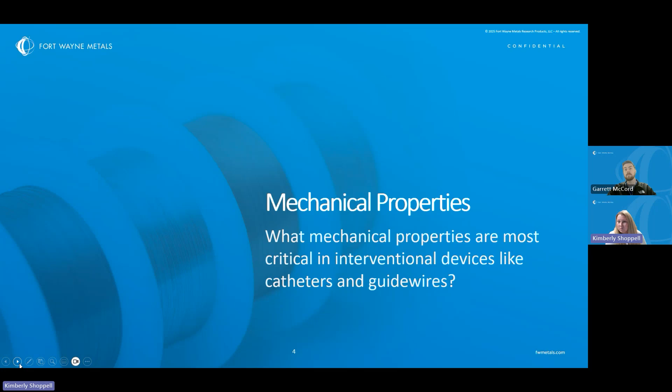The most typical mechanical properties of importance for these types of applications are generally tensile strength, elongation, modulus of elasticity, which also has to do with material choice, and sometimes yield strength. That's mainly if you want to specify yield strength over tensile strength, if you know your max load and want to ensure your device isn't yielding at any point based on those max loads.

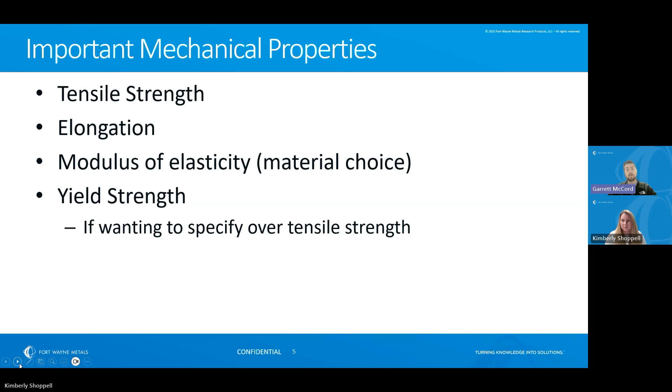So we have an understanding of high-level mechanical properties, but let's dive a little deeper. You mentioned tensile strength—how does tensile strength and ductility affect product performance?

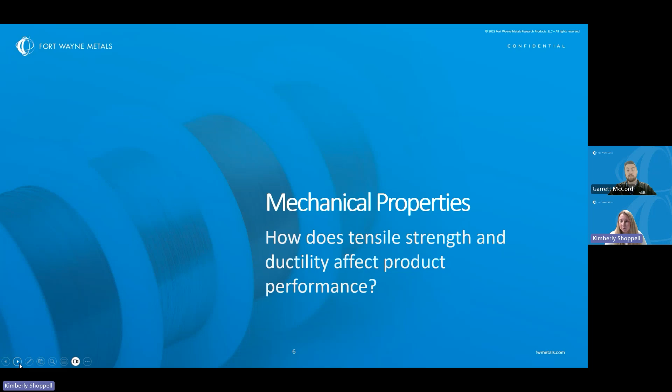Going over tensile strength and yield strength first, this really drives the main expectation for the overall strength of both the wire and the device being designed. The higher the tensile strength given a certain size, the more load the wire can handle before failure. The same goes for yield strength—the higher the yield strength, the more load the wire can handle before you start yielding your device or the wire.

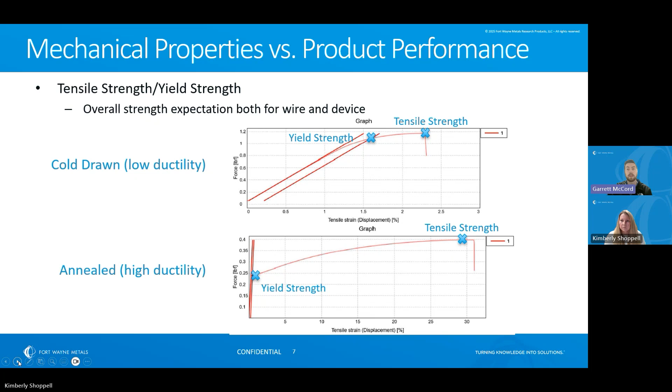Also, a higher tensile strength given a certain size for the same alloy will typically give the wire a stiffer feel. This means it's harder to bend and permanently deform the wire, compared to something like an annealed wire, which takes very little force to yield.

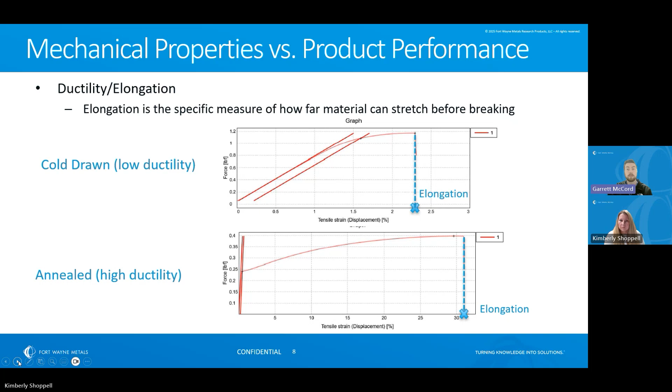Next, going over ductility—elongation is the specific measure for ductility, given as a percentage. This tells us how far a material can stretch before it breaks. So high tensile strength material generally has low ductility, and annealed or low strength material has high ductility. Both of these conditions have trade-offs that directly influence both the wire and the device.

Finally, modulus of elasticity, which I mentioned before, is due to material choice. This specifically defines how stiff the material will feel, and is just the slope of the elastic portion of the stress-strain curve.

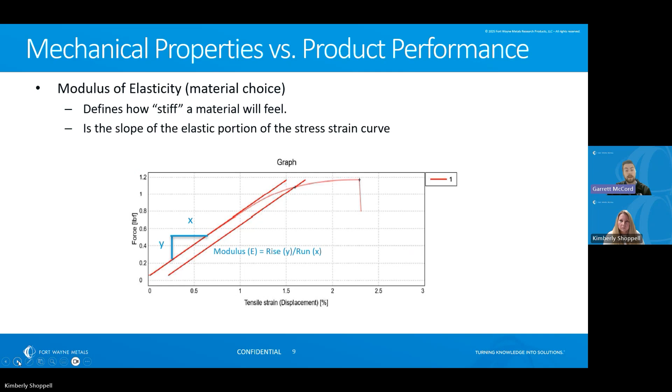All of these properties have a direct influence on device performance in conjunction with your device design in these interventional applications. Specific to guide wires, pushability, torqueability, and the ability to traverse tortuous paths are likely going to be very important aspects. A simple stainless steel guide wire may be good enough, however superelastic nitinol is likely worth a look given its special properties.

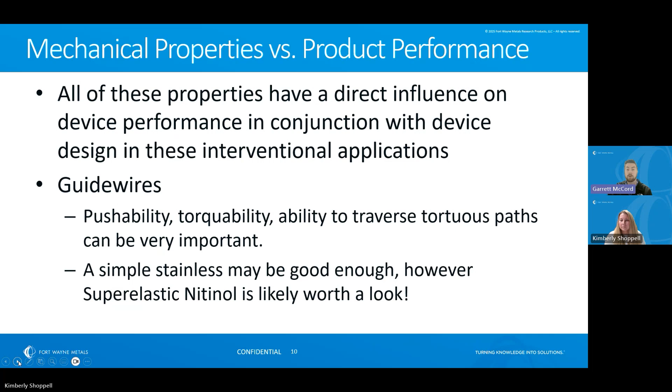And to recap, this applies to both guide wires and catheters in these types of applications. A higher tensile and a higher modulus is going to give you a stiffer feel. This generally translates directly to pushability, torqueability, and overall strength in tension and compression, but the trade-off is that the ductility will be lower. On the other hand, a more ductile or lower tensile material will give you a softer feel, which might be easier to bend around tortuous paths. But you have to look at your overall device design, making sure your pushability, torqueability, and resistance to crushing or bursting is still acceptable for your application.

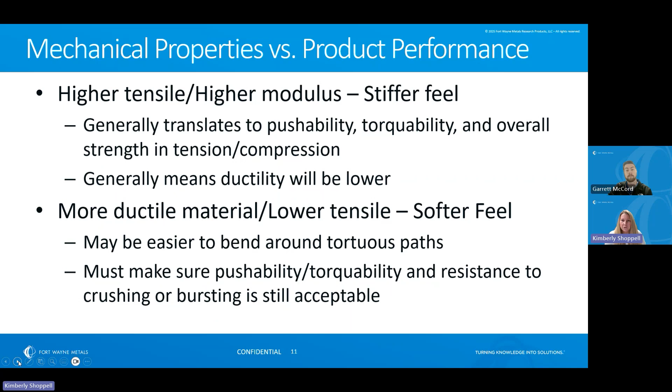Great, thanks Garrett. You also mentioned a couple slides ago high strength material. Can you talk a little bit about the challenges? I know you talked about tensile versus ductility. Are there particular challenges when working with interventional applications for high strength materials?

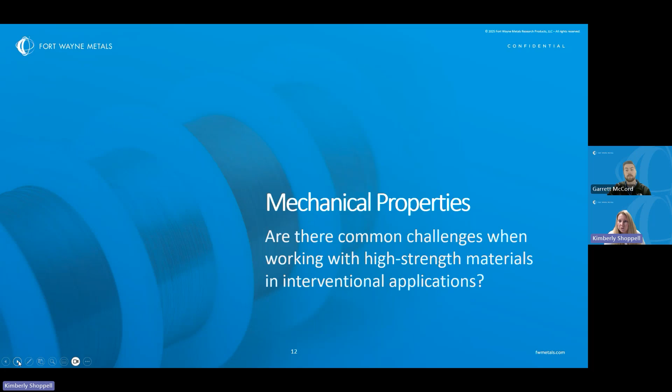Yeah, absolutely. Most of these challenges really come from development or otherwise process-related issues from our end when we're attempting to push the envelope. For example, we just developed not too long ago an ultra strength 304V, which pushes about 480 KSI on tensile strength. Whenever we're developing these products, we really have to make sure we dial in that process and ensure that the cost from our end is good so we can stay competitive, which also makes the device competitive as well for the market.

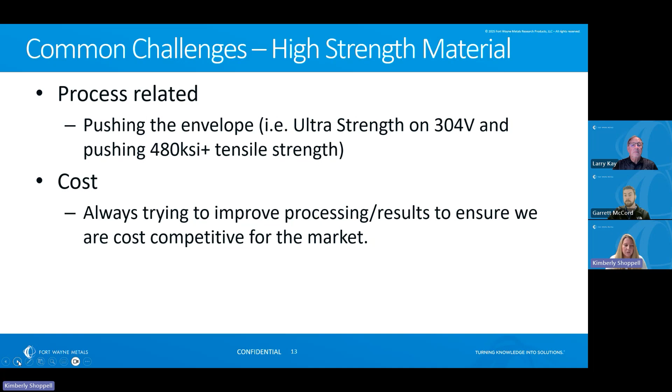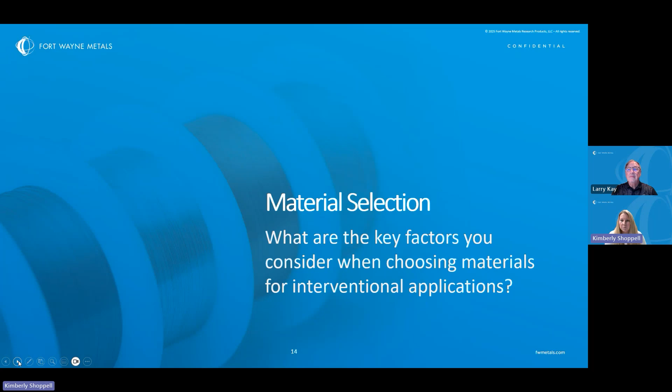So we're going to move on to Larry and talk a little bit about material selection. Larry, what are the key factors? Again, we're going to start with the basics. What are the key factors when considering choosing materials for interventional applications?

Kim, there are really four factors that impact your decision. They are the physical properties of the material you're working with or considering, the mechanical properties, which Garrett touched on a bit, and the chemical properties that result from the elemental construction of the alloy. Cost has to be considered, and while it's seldom the primary factor, you have to consider that as you navigate through the property options resulting from the choices you make.

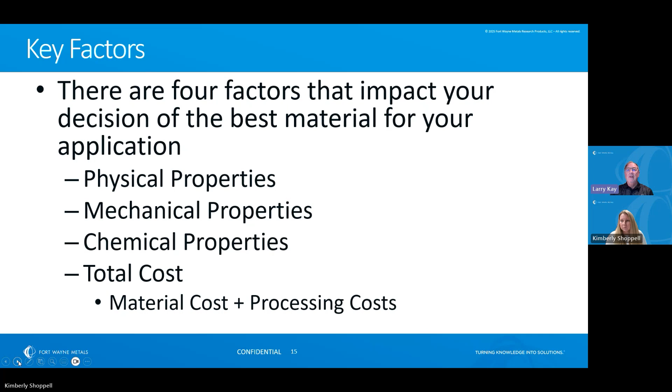We can delve into these in a little more detail on the physical properties side. These properties result from the chemistry specification of the alloy itself. They don't change, or at least change very little, upon processing from the ingot to the bar or wire shapes. They are measurements that are not related to the applied forces, so these result from just the elemental composition.

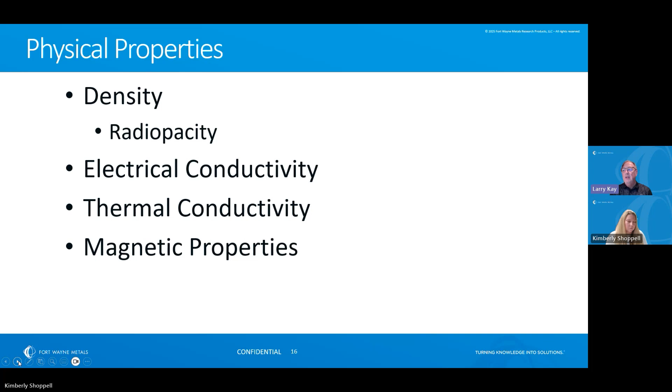The first one is density, which has a direct relationship to radiopacity. Higher density materials are more radiopaque and more visible under fluoroscope. Electrical conductivity and thermal conductivity again relate directly from the elements, and the magnetic properties are primarily influenced by iron-based alloys. If the application requires use in an MRI field, then non-magnetic alloys are called for.

Regarding the mechanical properties, Garrett touched highly on these and spoke about the strength. I just wanted to touch on the fact that these mechanical properties are evaluated by subjecting the material to a load and measuring its performance under the loaded condition. This can be done with both static and dynamic loads, and these properties vary by the shape and size of the material and the processing conditions, as Garrett mentioned. They have some influence from the metal's composition and internal structure. Elasticity is one I want to touch on here - the ability of a metal to return to its original shape after a deforming force is removed - and certainly nitinol materials are the standard when shape recovery is important.

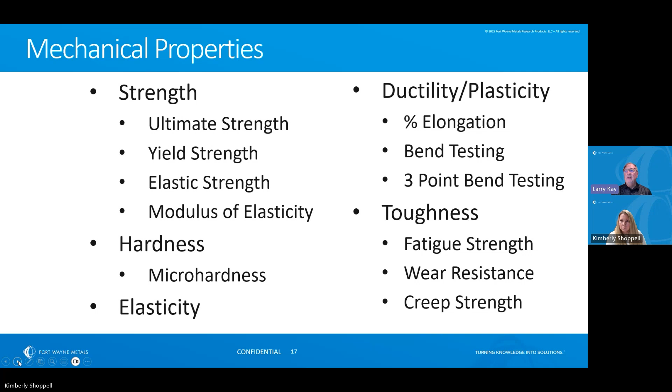And then briefly, the chemical properties. The resistance to corrosion and oxidation is controlled by the inclusion of materials that are fairly stable and do not lose or gain elemental oxygen easily. Metal combinations that create strong metallic bonds help to resist chemical attack. So there really is a balance.

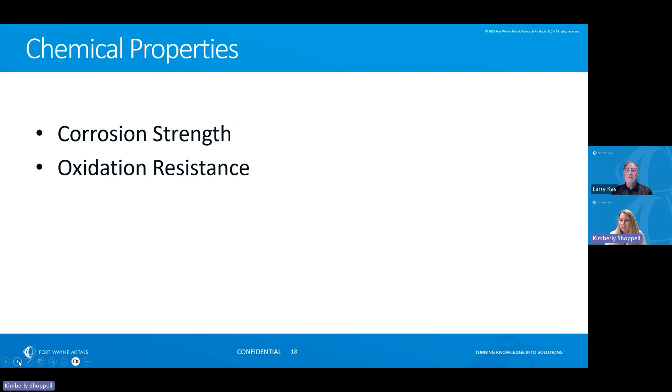I think this bridges us nicely between what Garrett talked about with mechanical properties and knowing that material selection is important, and some of those properties are inherent or compliant to what material you select. As you look at those things, Larry, what are the trade-offs you mentioned with cost? What are the trade-offs between cost and mechanical performance when you're looking at material selection?

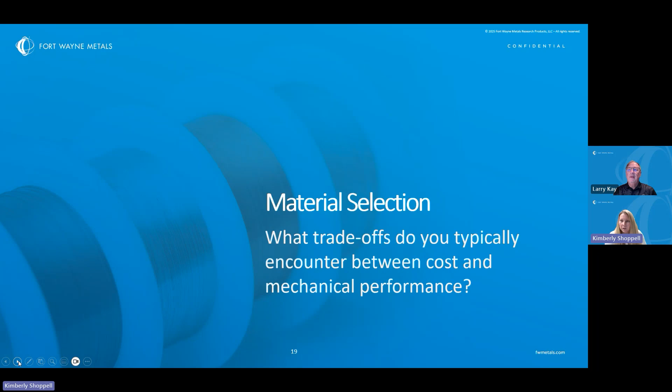Kim, the material performance is driven by the requirements. As you add more requirements to the design of the device itself, those increase the mechanical performance needs, and you can expect the cost of the product to increase. Costs are influenced by the raw material cost and the cost to process the material, both primary and secondary cost. Secondary processing costs can include any required coatings or surface treatments that have to be applied.

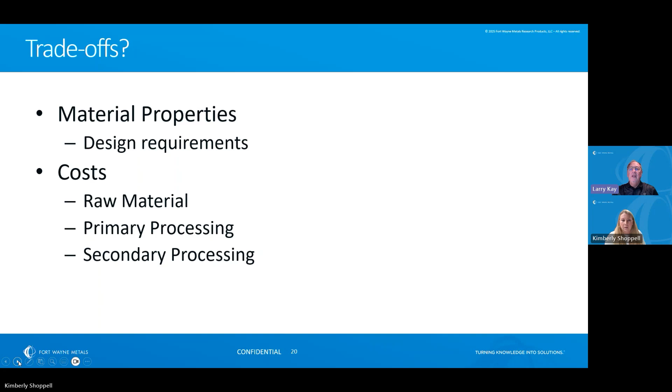There's a couple different ways to think about these properties and how they relate to the alloy selection. Balancing these requirements is best done with a material selection table or requirements table in a bubble chart format, at least as a guide. Some of the material manufacturers provide material selection guides, and these can be used to assist with understanding the placement of a specific alloy into a selection guide.

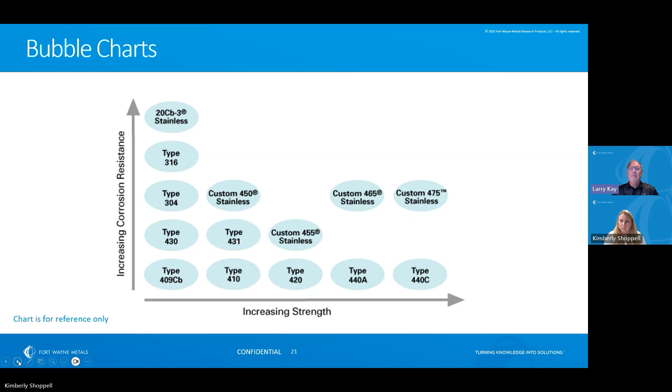After reviewing your requirements, decide which two properties that you'd like to compare. You can fill in the data with information from the supplier or generate your own data and make your own chart. Bubble charts have a limitation that they can only contrast two properties, and thus a comparison table like this can help when comparing multiple properties. The nice advantage of this table is it can also be done with relative properties rather than numerical data. Often you'll need to select a material based on one or two primary properties, and you can accept or apply design controls that tolerate other properties that are not ideal.

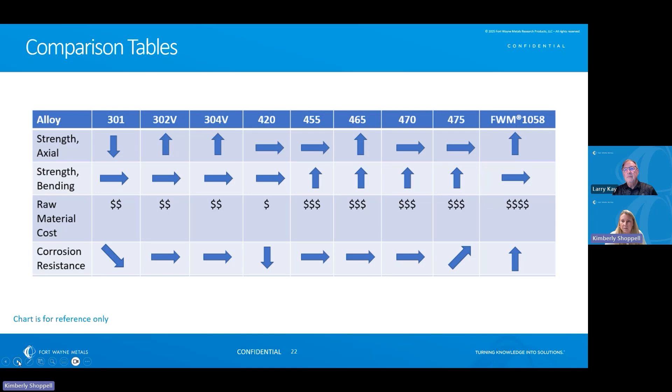Larry, there are so many options out there, both for material selection and mechanical properties. We often have conversations just like this about making selections about what's appropriate for our customers' needs. Let's talk a little bit about materials, but also emerging technologies. So, are there emerging materials or technologies that you're particularly excited about right now?

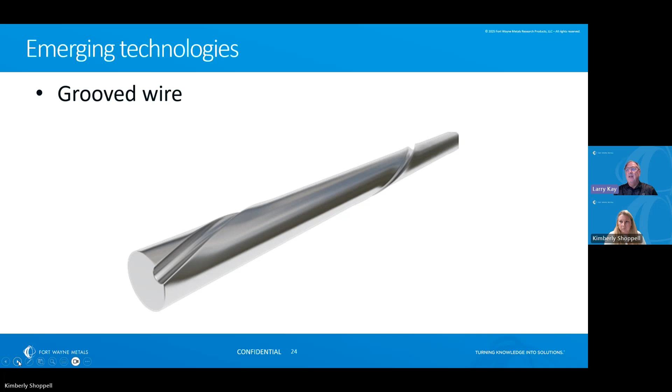Yeah, indeed, Kim. There's several that are being developed, and one of the newer exciting technologies is the ability to provide grooved wire shapes in most materials. For example, a grooved wire can be used to add electrical wires down the guide wire or a device that's connect a sensor at the end of a guide wire for any variety of sending a signal or receiving a signal back. Another technology that's occurring, Garrett touched on that some of our high strength materials, both in some...

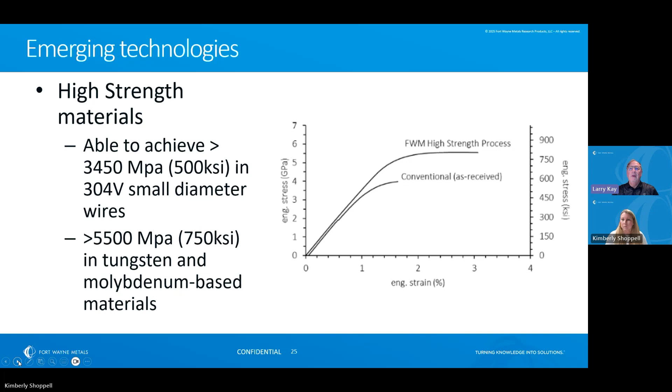Standard 304 stainless steels, where Garrett mentioned that we're able to achieve greater than 3.5 gigapascals in small diameter wires. We're also capable of achieving greater than 5.5 gigapascals with tungsten and molybdenum based high density materials, providing strengths that have just not been available to the designer before.

On the material side, there's a couple of new developments in shape memory alloys. A nickel titanium niobium alloy has been developed, which demonstrates improved strength to address this issue over traditional nitinol alloy performance. It retains shape memory recovery, but increases the stiffness of the material itself. Another development is a new nickel-free alloy. This is a beta titanium alloy that was developed specifically as a nickel-free alternative for nitinol alloys in medical applications.

Great. Thanks, Larry. I really appreciate you sharing those things. It's interesting. You and Garrett both mentioned stainless steel, nitinol, and alternative options. We continue to see customers asking for smaller and smaller materials with higher strength and better fatigue resistance. So it's good to see things are being developed.

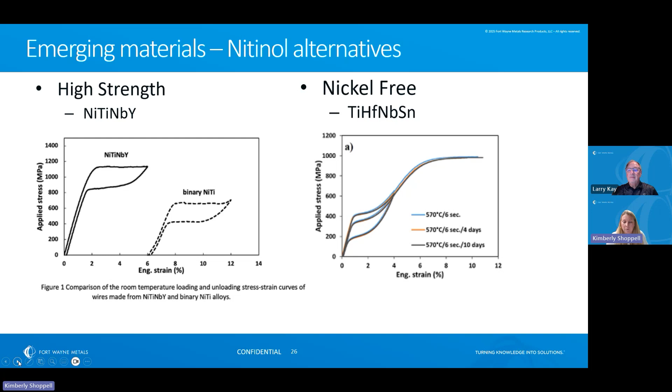And we're going to talk a little bit about a Fort Wayne Metals product called HHS Tube and its applicability to interventional devices. Mark, can you start by talking to us a little bit about what makes HHS Tube unique?

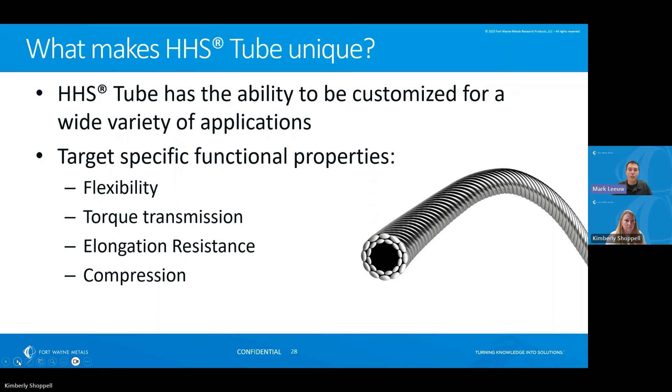So what's going to make HHS Tube so unique is its ability to be customized to meet a wide variety of customer applications. And the reason it's able to be so customized is due to its ability to target multiple different functional and mechanical properties. And these properties include things such as flexibility, torque transmission or rotational control, elongation resistance, and also compression. So this ability to be customized to specific applications and target those mechanical properties comes from both the available product forms and also the design parameters within those product forms.

HHS in its most basic forms is available as a single, dual, or triple layer round wire construction, but it's also available as a dual or triple layer flat wire construction.

Within these basic product forms, there are multiple adjustable design parameters. These include things such as the alloy or material selection, the wire count, the wire size, and also the lay direction per layer.

These adjustable design parameters are just things that can be adjusted that further tailor the HHS to the application's needs. Additionally, HHS allows for multiple different secondary operations to be performed to it, including things such as swaging, coating, shape setting, multiple different types of cutting that can be applied to the ends, welding, and even assembly work.

These secondary operations can be needed to further dial in those mechanical properties that are desired, or also just as a more convenient way to provide the customer with a more complete end product so that there's less work that they have to do on their end.

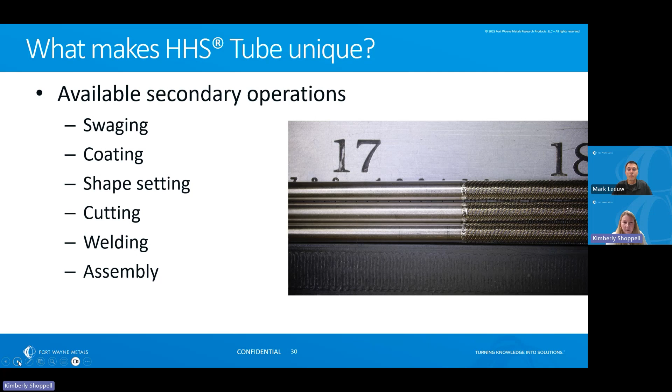Mark, you've given us a good overview of HHS and all the variety of custom options that can be tailored on the product. Can you talk a little bit about torque transmission and flexibility, which might be important in the interventional device space?

Yes, so HHS can be a good option for those applications that require both torque transmission while at the same time needing to be flexible enough to navigate those tortuous environments. It's the flexibility of the HHS that will allow you to get to that site of intervention, and then once it arrives there, it could deliver that needed rotational control or torque transmission to perform the application.

Whether the focus is more on direct torque transmission or more on flexibility, or a balance of those two properties, it's the various product forms and those design parameters that drive the ability to be customized to the application. Ultimately, it depends on the requirements of the application, but HHS tube will take various forms depending on what those needs are.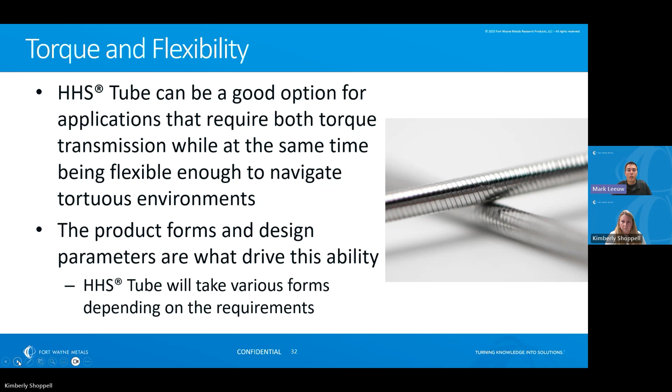For example, flat wire HHS will likely be more applicable to those applications that require good direct torque transmission, and the design parameters create a thin wall HHS construction, whereas triple layer round wire HHS constructions are going to be more suitable for those applications that require good flexibility while also good bidirectional rotational control.

So Mark, you spent a lot of time talking about the structure of the HHS. Can you talk a little bit about the significance of the open working channel?

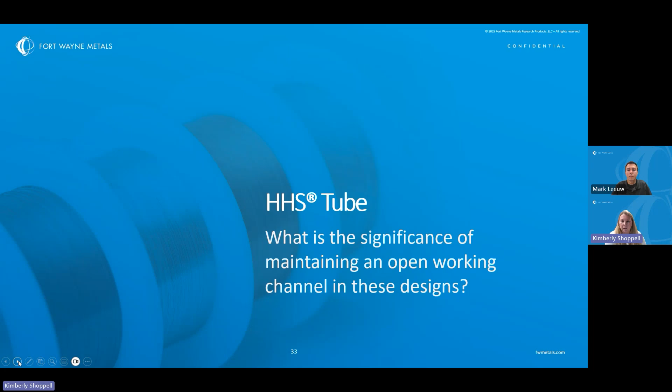Having that open working channel throughout the length of the HHS is going to simply allow for the needed components to get to that site of intervention. The flexibility of the HHS will allow for the creation of a safe pathway through that vascular curvature.

It depends on the requirements of the application, such as the mechanical properties that are desired, and also the design window that is being worked with. But generally, HHS can be produced with an inner diameter anywhere from 3 thousandths to 87 thousandths. Being able to produce such a wide range of inner diameters is another reason why HHS can be used for multiple different applications.

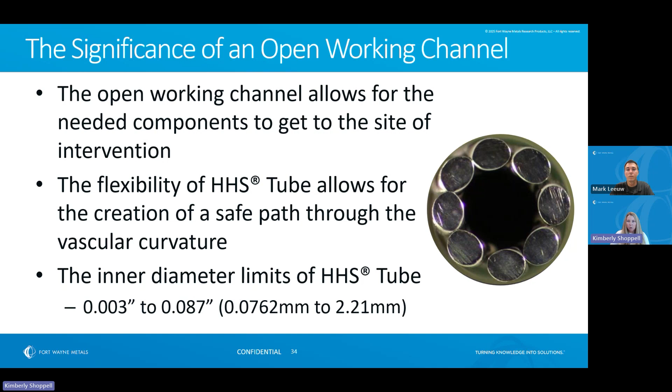Larry, we had a question that I think is an interesting one, and it relates to the grooved wire. One of the questions we had was, you mentioned potentially something carrying current, potentially something with a conductor or an insulation wire. Any challenges that you're aware of, or have you heard of, with putting something like that in the groove and that insulation? Is that a rough edge there, or what's been the experience if you have any?

No, it's a fairly smooth edge, and has a small radius at the end, so it's not sharp by any means. We can apply this to wire diameters everything from 0.25 millimeters to 0.50 millimeters. The groove size itself can be anywhere from about 15% of the diameter as a usable size up to almost 50% of the diameter. So the wire that can be inserted in the groove can be fairly large, just a function of how much current needs to be carried on that signal wire.

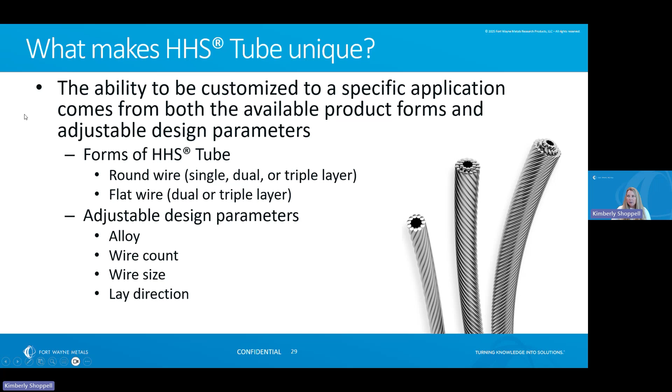Certainly, Kim. Yes, it does need to spiral. Most of the applications have a straightening process applied to the wire, and as we apply that straightening process, it does create a spiral pattern in the groove itself.

That's correct. Perfect, thanks. Larry, I think in that product we're able to supply it—it's traditionally supplied spooled, is that correct? I think we would prefer to supply that in straight lengths. For the groove wire, the preference is straight lengths, which would be cut. And to further what you said, that groove will move around the wire in a spiral fashion.